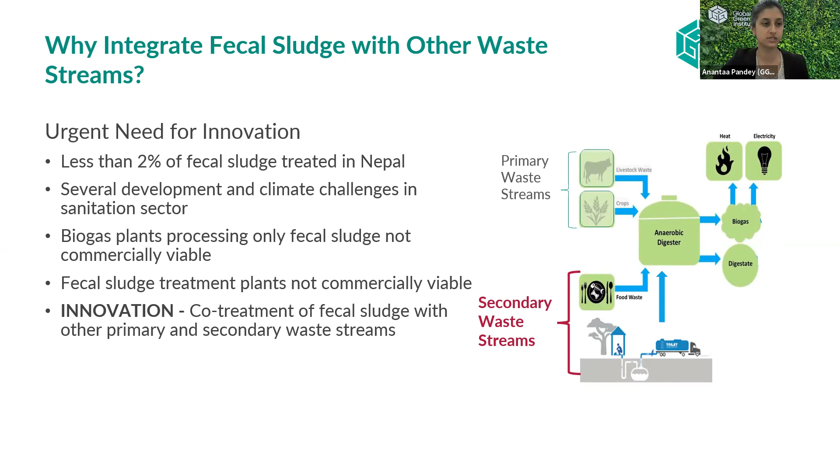To address this urgent need for innovation, GGGI and AEPC are in the process of developing a project that will address many issues in the waste sanitation value chain. Specifically, this project aims to ensure availability of good quality municipal solid waste and fecal sludge by implementing proper waste management practices. This will be done by supporting the municipalities in developing regulations as well as awareness campaigns necessary for proper containment of fecal sludge and implementing waste segregation practices.

The project will also provide additional incentives to the private sector for integrating these unconventional waste streams, which are also considered high risk by the private sector.

With this project, we will be able to increase community resilience to the effects of climate events such as floods. Communities that were previously exposed to floods and resulting health effects due to contamination of drinking water sources will have higher resilience as proper waste containment infrastructure is built and infiltration of groundwater is avoided.

The project will also provide support to the local governments and private sector in developing public-private partnerships so that one party alone does not bear all risks related to implementation of projects in the sanitation sector.

Risks to the private sector in terms of market for biogas and organic fertilizer will also be minimized through coordination with markets to develop markets as well as municipal authorities to develop long-term offtake agreements.

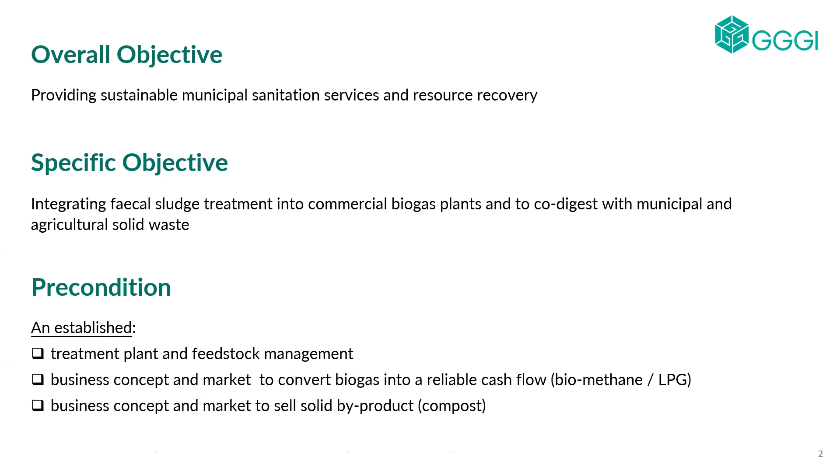The precondition to make this actually feasible is having an existing or established treatment plant and feedstock management. Often there are projects trying to recover energy and resources from fecal sludge, and then we need to find out how are we blending the sludge with other feedstock, where are we getting it from, who is operating it. In this approach in Nepal, which I like so much, we have an existing full-scale biogas plant, and we just need to integrate fecal sludge, not the opposite way around, starting with the fecal sludge and finding everything else.

The same is true with having an established concept and market to convert biogas into a reliable cash flow. We all dream about biogas: A, we need to produce sufficient biogas; B, we're dreaming of converting biogas into cash. But in reality this is difficult. Producing electricity into the grid, selling the electricity, having the real enabling environment for this is difficult.

So in this case, in Nepal, biomethane has been introduced to the market. We have a running system, we have a business case converting biogas into cash. This is a very important point - many projects fail on this component.

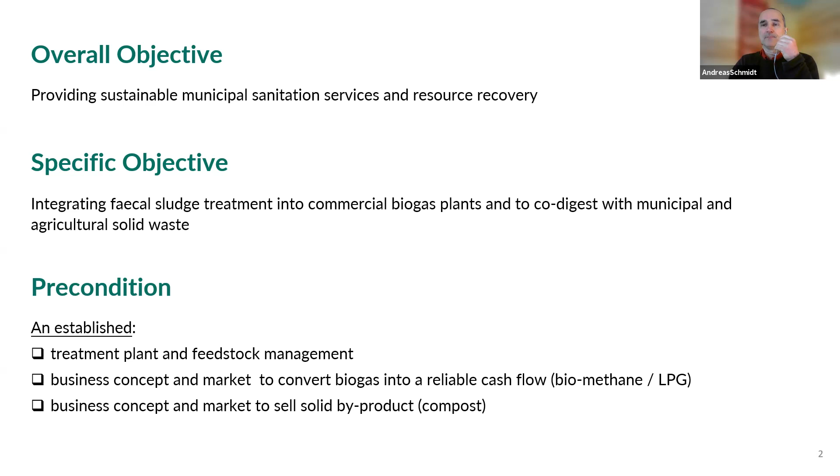The second is we have an established business concept and market to sell the solid byproduct, the compost. This is also a tick-off in Nepal, which in many countries we don't have. I introduced composting facilities in East Africa, and it took a long way to establish compost on the market. I think Nepal went through the very same learning curve, and finally they reached this point. Now things become a business case. So this is all precondition which we now have in Nepal.

So with GGGI, we conducted a study with the question: is this actually possible? This kind of co-digestion, and we had a couple of leading questions - is fecal sludge integration possible without disturbing the biogas process, and how much sludge can we put in? Our answer, now we could say, yes, it's possible, as long as we maintain the classical operation parameters the biogas plant is designed for, meaning the hydraulic retention time, the concentration in the biogas plant, and the organic loading rate. So in the end, the concept is that fecal sludge is rather a diluting means than actually a huge energy source, because the organic waste comes with a total solid content of more than 20 to 40%.

It's very solid, but our digester, the reactor, runs with a TS of 8 to 12%. So in the end, we need to dilute. And currently they're using water, or they're using water recycled from the pond to dilute. And this can be replaced by fecal sludge.

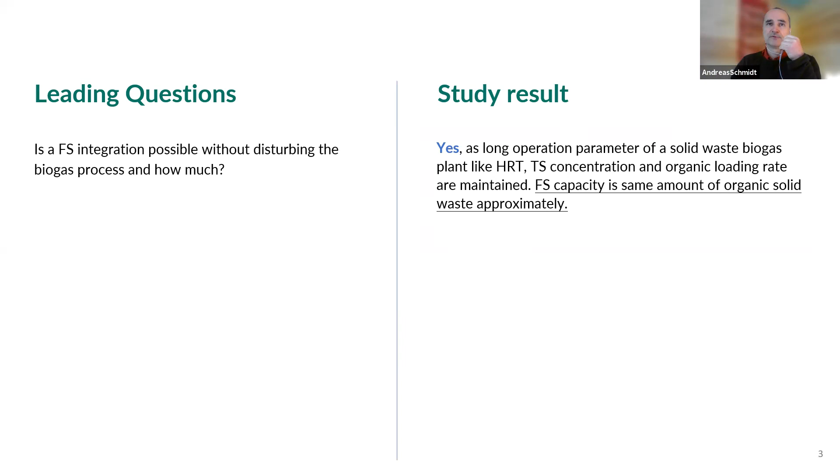And approximately, we could say if you got 10 tons of organic waste, you need to dilute it with another 10 tons to reduce the TS. So the other 10 tons could then be fecal sludge. Or if you have 50 tons of organic waste, you can put it in with around 50 tons of fecal sludge. So it's a rule of thumb.

Can the additional outputs be generated, and can the revenue cover the additional cost? Yes, in principle, yes, but the output quantity, how much gas or additional compost we produce, and the cost recovery potential depends very much on the quality of the fecal sludge, and as well the way we pre-treat the fecal sludge.

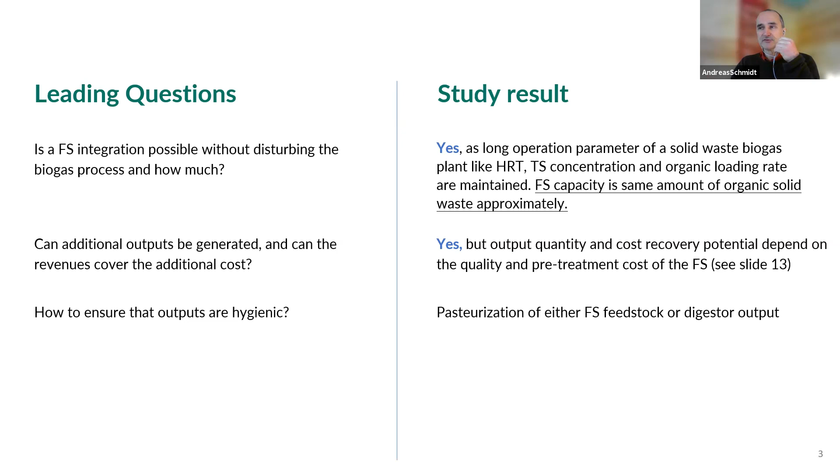I will show a little bit more on slide 13 in this presentation how to ensure that the output is hygienic. So this was always a bit of a concern, and we agreed we need to pasteurize the fecal sludge either in the beginning before it goes into the digester, or at the output of the digester.

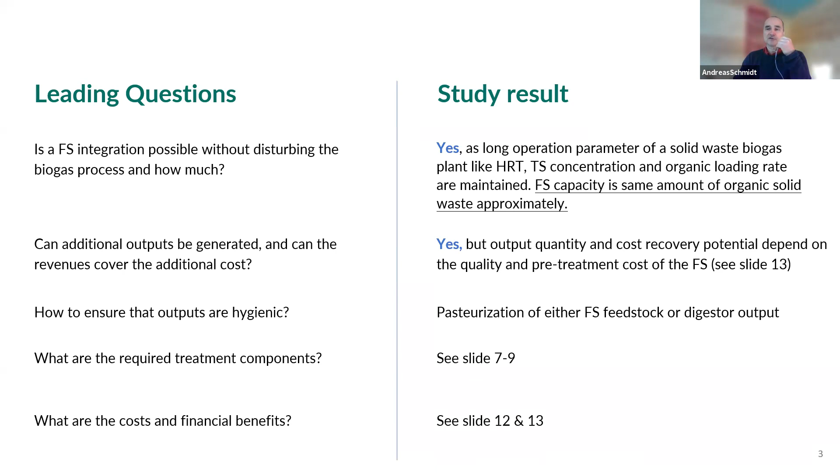And what are the required treatment components? I will present a bit later. And what are the cost and financial benefit? I will also present a bit later. So those were a little bit the leading questions, and I'd like to present then the results.

Just before, I'd like to update, or maybe you all know this, but I think it's important to put ourselves in the scene. So currently we have 3 commercial biogas plants in operation and 12 in preparation, planning, construction. They're all producing biogas in a range of 1,000 to 4,000 cubic meters per day, which is substantial. They're all running on organic, municipal, and agricultural solid waste.

Almost all plants are operated by private companies, which are also involved in the solid waste collection service. Also quite an important point. And you have this fantastic program where you're subsidizing the initial cost up to 40%. So this is somehow the framework.

And how it technically looks, I would say the current biogas plants, the designs I have seen, are a simplified biogas technology. It is simplified in design and operation. So it's a one-stage biogas plant. We don't have the hydrolysis. We're running the biogas plant at low loading rates.

The heating, let's say they're not running completely at 35 degrees, they're also running at lower temperature. They're not insulated. It's a very simplified design, which I think is quite appropriate and a good starting point. Of the plants, I think only 1 or 2 are producing electric energy with a co-generator. Most of them are producing biomethane, bottling and selling it.

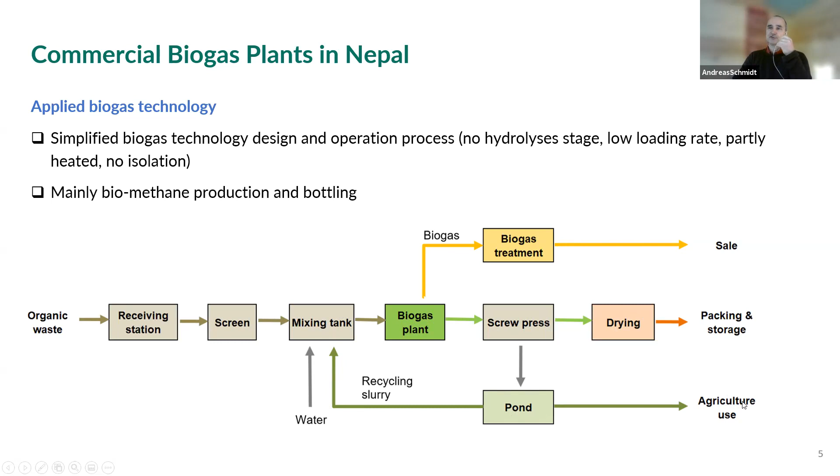So in Europe, we have much more upgraded biogas plants. And the question is, is this really necessary? And I think it's a good approach here in Nepal. So how do we technically integrate fecal sludge now?

We have a receiving station. We need to screen it very carefully, also taking out sand; everything we don't want in our biogas plant should be separated. And then one way is taking the entire sludge through a pasteurization unit, into the mixing tank and then into the biogas plant.

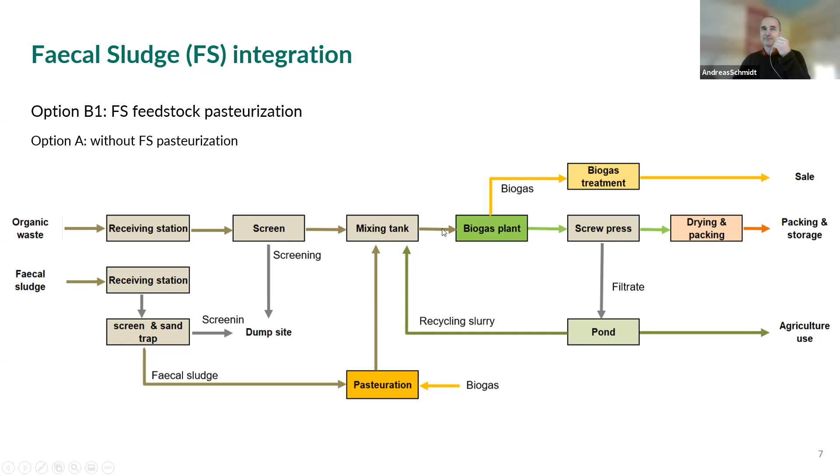There is very different opinion about it in research documents. We in the project decided to go on the safe side, having no exposure to the operator, pasteurizing everything which goes into the biogas plant. Another concept is where we add another component: we just put the thickened sludge, after an additional solid-liquid separation, which is a settler, into the biogas stream, and the liquid fraction goes to treatment and then into the pond.

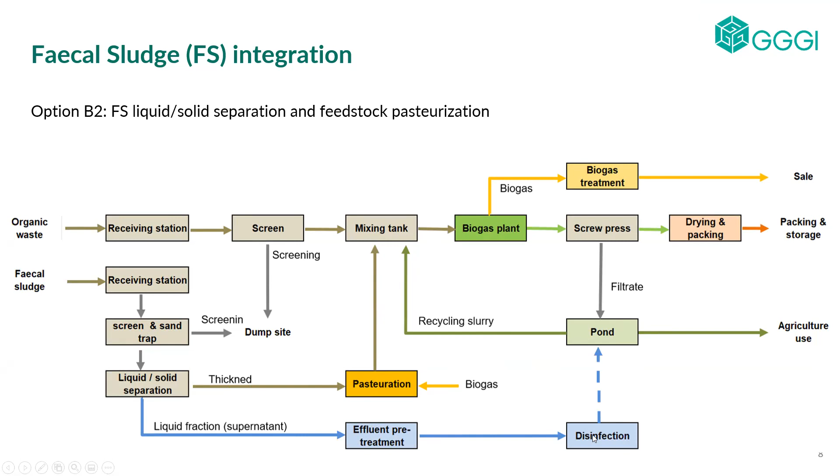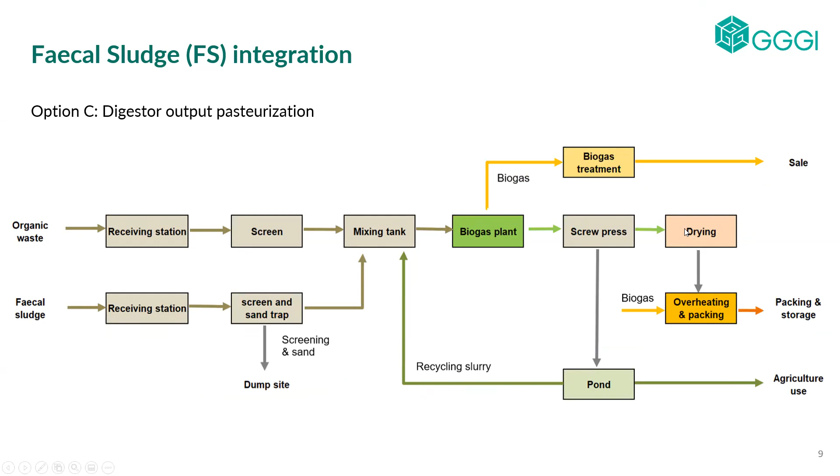And the last option is that we disinfect only the output, the solid output. That means the dried compost gets once again pasteurized, overheated, before it goes into the packing and storage stream. So this is the third option of integrating sludge. Once again, we go without pasteurization, only mechanical treatment into the mixing tank and biogas plant, and disinfecting the output.

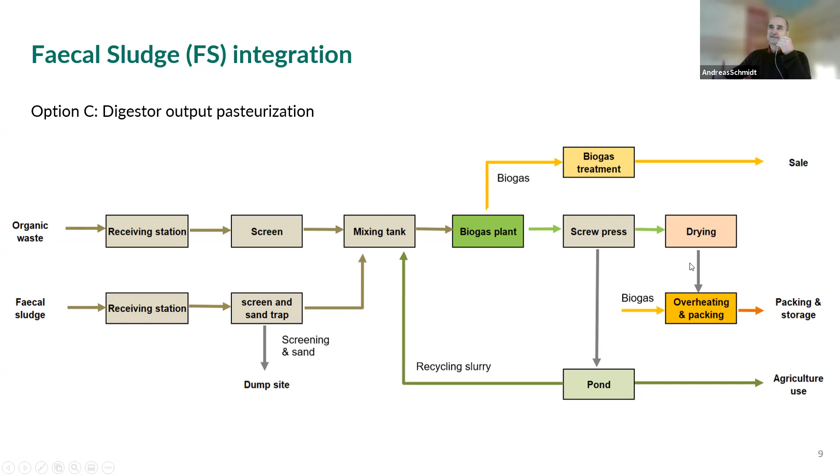The results of the case studies, a little bit more in detail. We looked into these two options, that means pasteurizing in the front. So what are the pros and the cons? Everything has pros and cons. On one hand, we produce 5 to 10% additional biogas through fecal sludge. People dream about a lot of biogas, but it's not true. In reality, it's only 5 to 10%.

We looked, and it took a bit of time to understand how the existing biogas plants are operated, and we found out they're not constantly running at 35 degrees. They have a heating means, but usually it's not sufficient. It's rather to heat up the temperature a bit more in the winter. So we looked at the case of Itahari, where the average winter temperature goes down to 15 degrees.

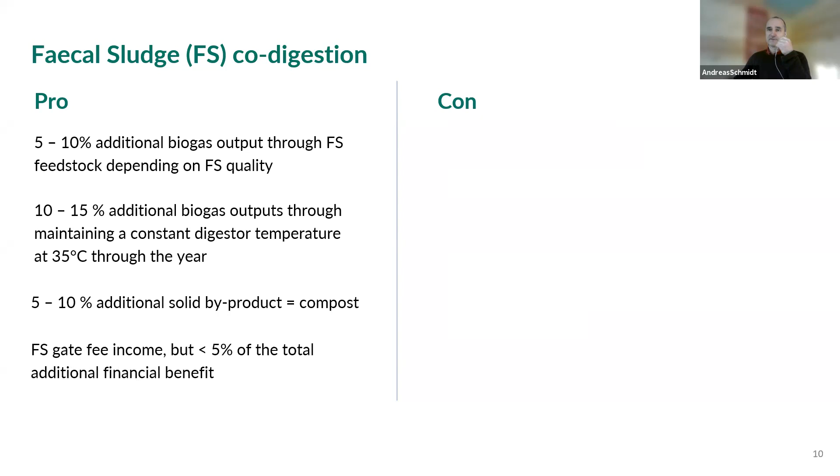And here, if we keep the digester at 35 degrees throughout the year through the pasteurization, having the heat available, we generate another 10 to 15% additional gas, just by improving the energy management of the system. We generate 5 to 10% additional biosolids, which go into the compost, and we will have a gate fee income, but this is quite small. Currently, we estimated less than 5% of the total financial benefit comes from the gate fee.

And a reminder: we always think fecal sludge contains a lot of energy and biogas potential, which is not really true. It's very low, in fact, because what brings the energy is the organic waste. From 1 ton, you can generate 50 to 70 cubic meters of biogas. From 1 cubic meter of raw fecal sludge, only 2 to 4 cubic meters of biogas. It's really minor. Nevertheless, it adds to the benefits, and this we'd like to show a bit in the financial figures as well.

So on the con side, we need additional technical components: a treatment plant, a pasteurization unit. We need an additional operator. We need a little bit of land. We have investment cost, operational cost. We might need operational approval. So from the operator side, it's an additional burden. It's not like he takes poultry or another organic waste. Fecal sludge really brings an additional technical and operational stream and standard operating procedures into his concept.

We found out that even in Nepal, you have areas which are a little bit warmer and some which are a bit colder. If you place your biogas plant in an area where the winter temperature drops, the operators need to spend quite substantial energy on heating, keeping the digester at the optimum temperature. So here the benefit of fecal sludge, because we bring in hot feedstock, is much more than in the lowland, in very warm conditions, where the benefit of the temperature optimization is going to be less.

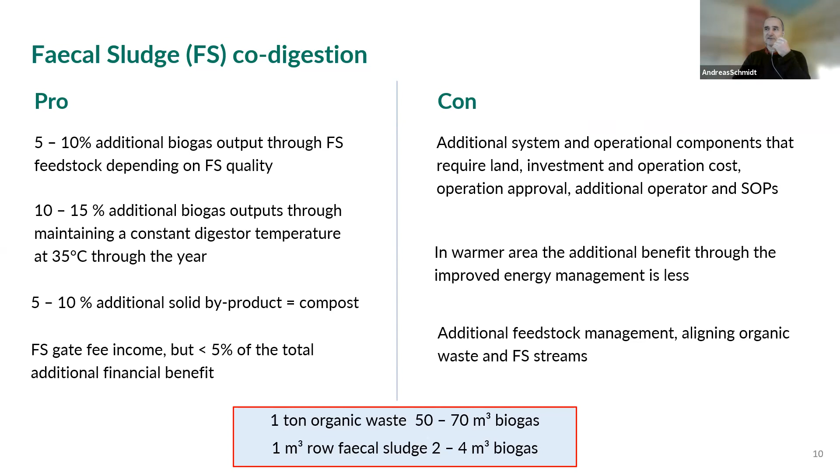So this aligning of both streams, I think it's worth looking into a little bit more in detail: how we can do it with storage capacity and logistical instruments, aligning this feedstock so that we don't have too much or too little fecal sludge. So we looked a bit into optimizing the energy management.

It took a bit of time, also discussion with operators and biogas plant designers for Nepal, to understand how they actually operate the plants. I don't want to explain too much, just the idea I'd like to show here. These are the months from January to December. We know that in the case of Itahari, in January, it's around 15 degrees. So we've got the ambient temperature on this side. The temperature goes up in the summer months, and then it drops down.

Accordingly, the temperature of your feedstock, the ambient temperature, is also going up and down. And if you want to keep the biological process in the digester at the same conditions, because you want to have the same methane and biogas production for your business, you need to maintain the temperature. But that means you also need to heat. And most of the biogas plants are also not insulated.

So in the winter, there is quite a substantial amount. This is now both kilowatt hours for heating and biogas, so these are the heating curves. You need a lot of heating energy in the cold period. We compared how much energy is required to keep your digester at 30 degrees throughout the year, or at 35 degrees, with fecal sludge and without fecal sludge, and how much biogas you can produce accordingly, because you need some portion of the biogas for heating needs. So this is roughly the idea.

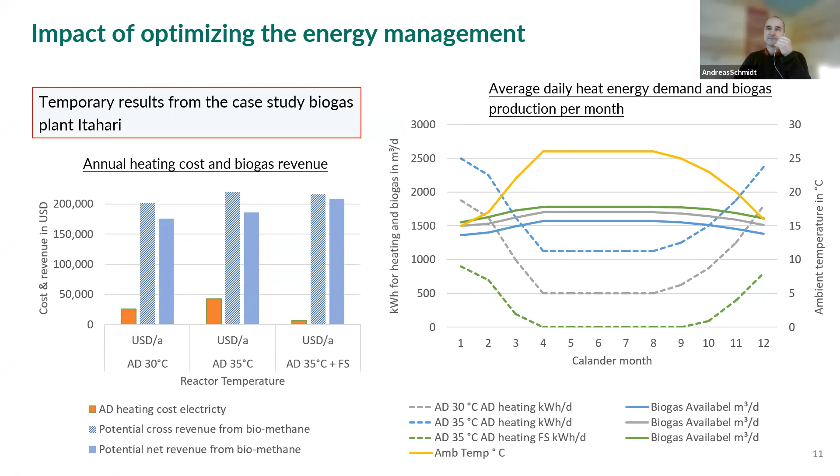Currently the operators are heating partially. If the temperature drops too much, they heat a bit, but they're not really keeping the temperature at 35, in our opinion. If they kept it at 35, theoretically they would have much higher costs for heating the reactor, and they'd produce more gas, but in the end the heating costs eat up the final revenue. So the revenue difference between both operational procedures is actually not so much. That is why most operators are not spending much effort on heating, rather keeping the operational cost at a moderate rate.

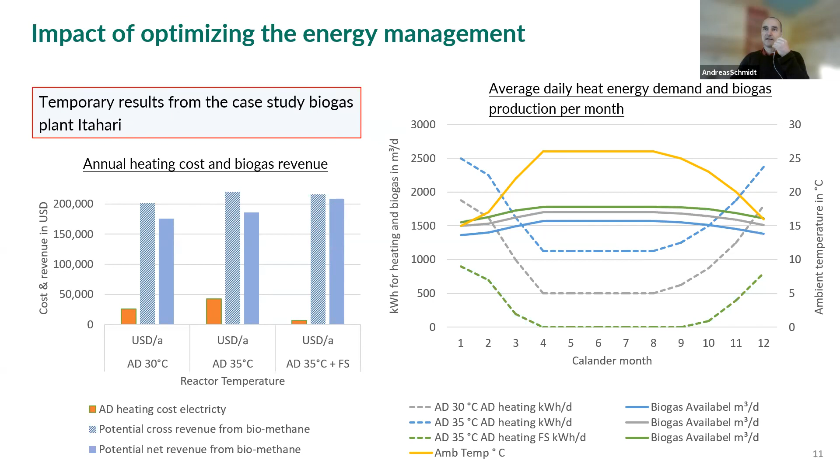With the fecal sludge, we need to pasteurize, and pasteurization means we have to heat it up to 70 degrees, meaning we get a substantial amount of feedstock with a high temperature. This heat we can use to keep your digester at 35 degrees throughout the year, and we're producing more biogas, also from the fecal sludge, so in the end the revenue they can generate is higher than in the other two cases. So these are some first outputs from this Itahari case study.

Now when we look at the capital cost and operational cost, in this case we have a treatment infrastructure for the pre-treatment and pasteurization, here assumed at 114,000 USD, plus some engineering. Let's say we have a CAPEX of 130,000 USD. Then we need an additional operator. The operation management, we say, is there anyway.

We recommend having an operational service contract from the supplier of the pasteurization unit. Security is not needed. We need a substantial portion of the biogas itself to provide heating for the pasteurization. So this is the cost side. At the moment it's common that the digesters are heated by electricity, so we assumed the same. We need some topping up just in the winter.

We calculated the cost for the pumps. We calculated cost for solid waste, because all solid waste in the fecal sludge needs to be separated and disposed. We estimated, out of our experience, repair cost annually based on the CapEx, which is around 2,600. And we put depreciation cost, which is often not common, but I think it's right to put it in, of 6% of the CapEx. So another budget of 7,800, which is depreciation cost. So you have, after a period of 10 years, money left for a complete reinvestment of this

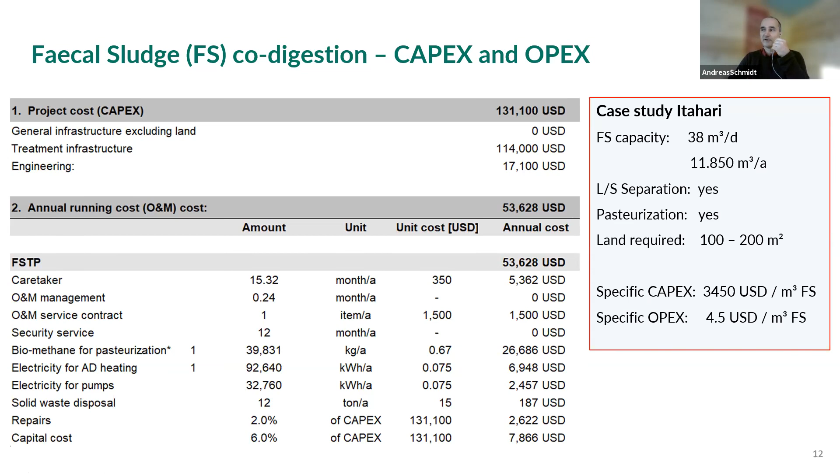130,000. And in this Itahari case, we have an average of 38 cubic meter a day, or leading to nearly 12,000 cubic meter a year. We got liquid solid separation, we have a pasteurization, and we need around 100 to 200 square meter additional land for placing this infrastructure. We have a specific CapEx of around 3,400 USD per cubic meter fecal sludge and an OPEX of 4.5 USD per cubic meter sludge.

And if we now look at the revenue, how much revenue we can produce to cover the costs? We have the biomethane from the fecal sludge itself, which is leading around 13,000. We got additional biogas through having the higher temperature. This is now compared to if we're running at 30 degrees. Another benefit of 32, which is very substantial. And we got additional compost from the fecal sludge, adding up to another 14. And we have a gate fee, which I mentioned. Currently it's very minor, but anyway, it's an income of around 2,300.

All these numbers are a bit dependent on the case and also on the quality of fecal sludge. In Itahari, the data the team from GGI collected has shown that we have got a very diluted fecal sludge with a low TS content, which is also reflected in this additional compost. But if we compare running cost to revenue streams, we have a substantial positive balance of more than 8,000 USD per year. Meaning here, adding this specific revenue, it's 5.5 USD per cubic meter. And if we're reducing the running cost, the investment cost for the pasteurization, and if we're having different sludge quality, then the figures might change, to more positive or they can reduce slightly.

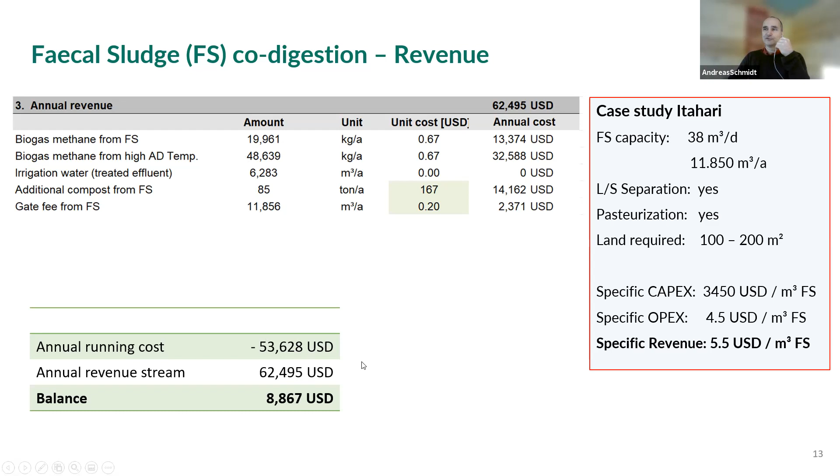So in conclusion, we can say fecal sludge co-digestion into an established commercial biogas concept is feasible, and it has the potential of being one of the best value for money concepts from the perspective of FSM. Because with a CapEx of 2,500 to maximal 4,000 USD per cubic meter fecal sludge, it's very low. Commonly, we have usually 7,000 to 15,000. There are also plants having more than 15,000 investment cost per cubic meter fecal sludge. We have the potential of 100% cost recovery. And honestly speaking, there's hardly any concept for fecal sludge that meets these numbers.

In the last 10 years, a lot of plants have been put up with composting, with biogas, with biochar production, but none of them actually has this potential of such low figures. But nevertheless, from the point of view of a commercial biogas operator, fecal sludge is rather a troublesome, low-value feedstock. You have seen the low energy content of fecal sludge compared to any organic solid waste. So there is a natural resistance potentially from the operators: why should I take fecal sludge, will it disturb my business concept?

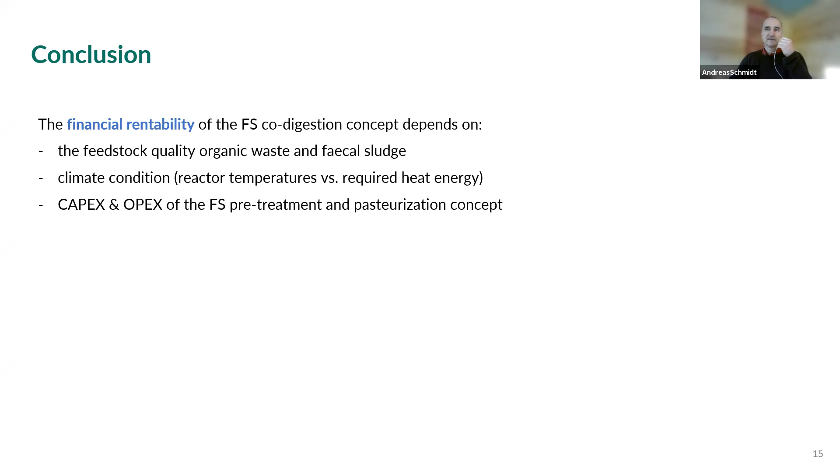We'd like to say that all figures we presented are based generally on specific case studies as well as interviews we did with operators and plant suppliers. Only in a pilot project can evidence-based figures and operational experience be generated. The financial rentability of the co-digestion concept depends on the feedstock quality of the organic waste as well as the fecal sludge, the climate condition, meaning reactor temperature versus required heat energy, and the CapEx and OpEx of the fecal sludge pre-treatment and pasteurization concept.

Further, we would like to recommend: currently we have in Nepal 3 fantastic commercial biogas plants in operation. Another 12 are in preparation, and it's worth investing in and running applied research and monitoring programs, as well as operator training programs, to optimize design, operation, and feedstock management of commercial biogas plants with and without fecal sludge integration.

I think there is potential really from these 3 to extract the learnings, and it might be going on. I am just not aware of it, but if I see the biogas industry we have established here in Germany, we have currently around 5,000 of this kind of big scale systems. So there is an operator association, there is exchange, there is constant optimization going on. Also maybe having a 2-stage digester, how we really can optimize the business case, getting more gas out of it, integrating other feedstock like fecal sludge to the most benefit of this concept.

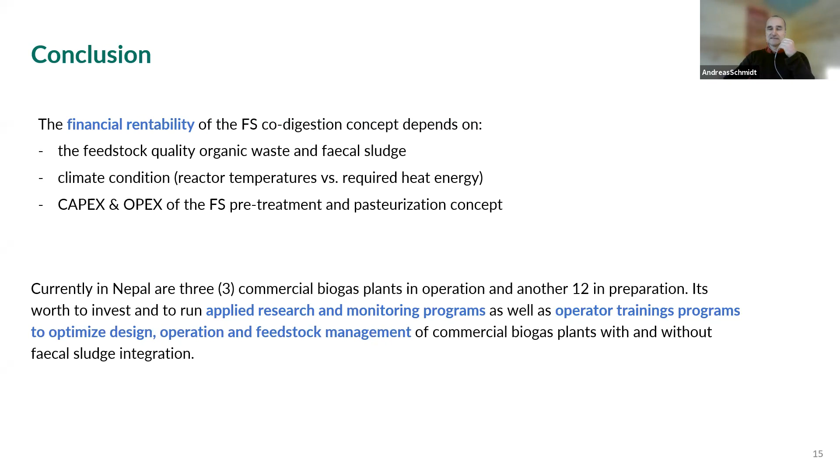Thank you very much, Andreas, for your wonderful presentation. You have highlighted the type of feedstocks you used as organic waste and fecal sludge, and the importance of the loading rate, temperature, and mixing ratio. I think a mixing ratio is also important. I think you use that when making the proper proportion of both types of feedstocks as a co-digestion, because volatile solid content and carbon nitrogen ratio is very important to determine the efficiency of the biogas plants and biogas yield. Similarly, plant design and the concept of the pasteurized and non-pasteurized ways to get the biofertilizer as well.

You highlighted those points, which is very important. Likewise, financial benefits analysis, you did a very thorough analysis, including recommendations to move onwards. Thank you so much. You have done a wonderful presentation. We are indebted to you as well.

Moving the webinar forward, we have many intellectual persons here with us, whom I would like to request to reflect their views about the presentation. Firstly, we have Mr. Prakash Amatya. Mr. Amatya leads the Aerosan Sustainable Sanitation, a social enterprise model for sanitation that benefits low to middle income populations and especially women. It is basically a program, the public toilets piloted in Nepal. I would like to request him to reflect his views about the presentation. Welcome, Prakash, sir.